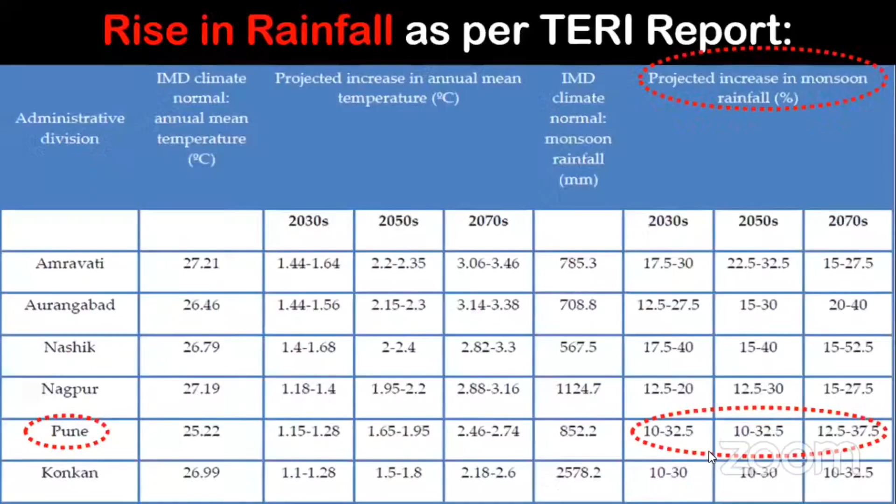Okay, all clear. Yes, yes. Yeah, perfect.

Yeah, so what does TERI say? They have divided the entire state into 6 divisions. Out of that, for Pune division, by 2030 the rise in annual rainfall is going to be 32.5%, and up to 2070 the annual rainfall is going to rise by 37.5%. This is a huge rise, more than 30% is a huge rise. And in fact, what is being observed is the actual rise in annual rainfall is more than what is predicted, so they are conducting additional studies for this.

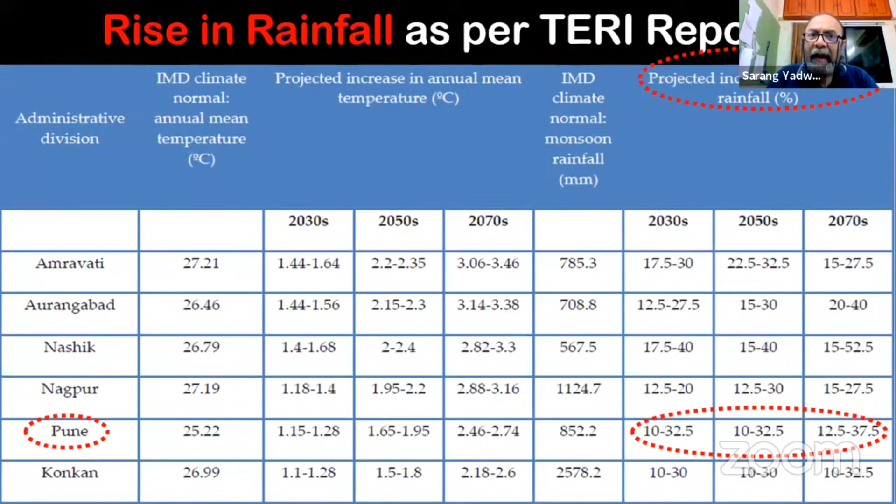And more importantly, what they have said... Shatakshi, yeah.

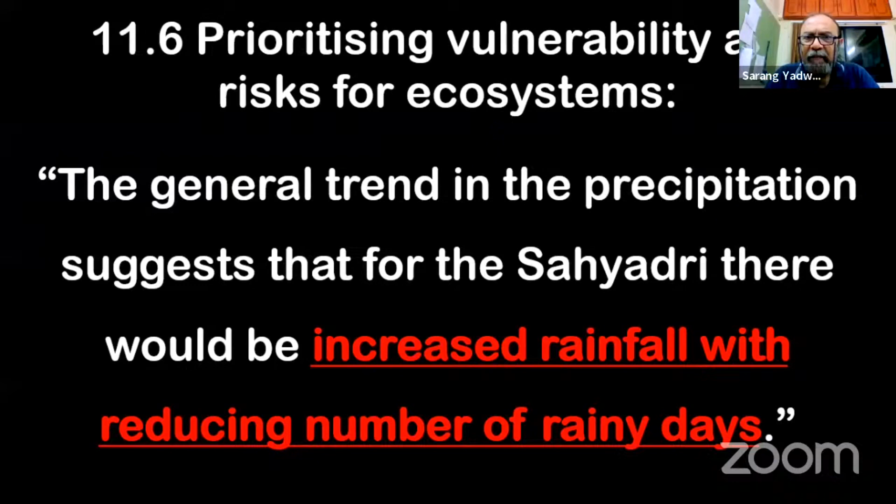They have said that a general trend in the precipitation suggests that for the Sahyadri, there would be increased rainfall with reducing number of rainy days. Means we are going to get increased rainfall. We are on the eastern edge of Sahyadri. They clearly stated that in Sahyadri, rainfall is going to increase, but rainy days will be reduced, meaning the intensity of rainfall is going to rise. We are going to experience more events of cloudbursts, and we all know cloudburst means floods everywhere.

In 2019, we have experienced it from a very close distance, as far as Mula, Mutha, or even the small tributary Ambil Odha is concerned.

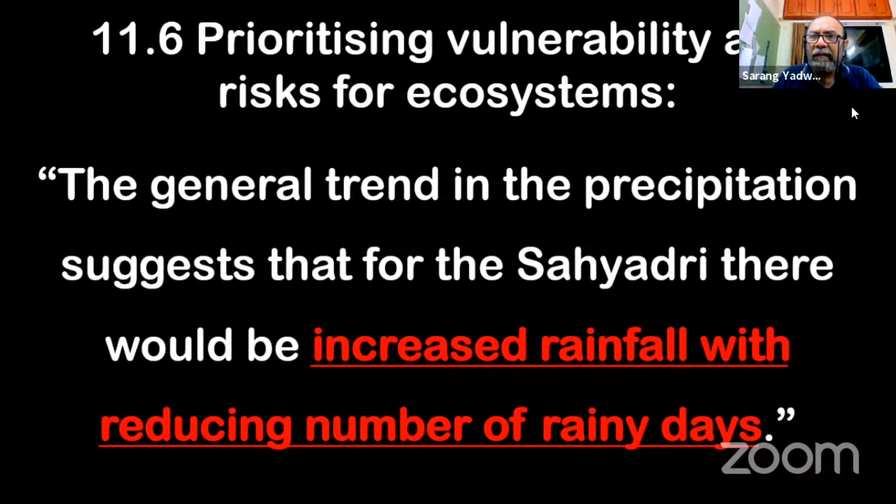Now, what are the objectives? Objectives as given in the DPR are: first, topmost objective of this project is to reduce risk of flooding. Second is clean the river and make it pollution free.

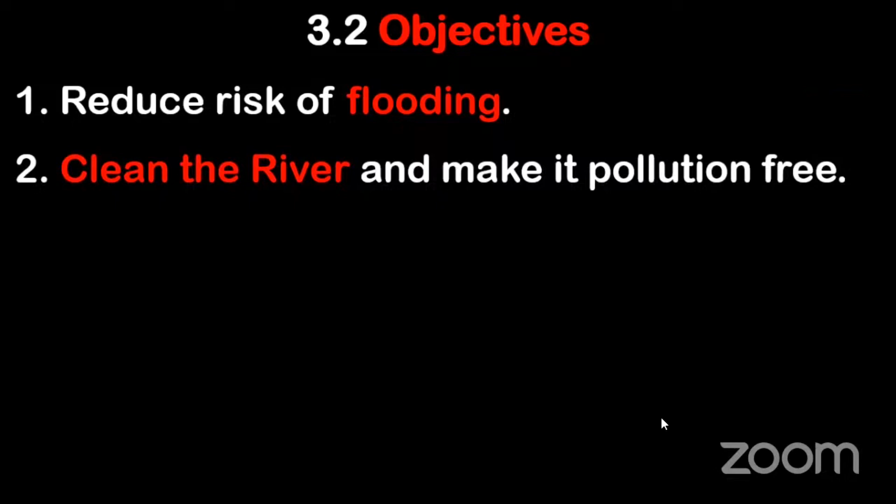Something is wrong, Shatakshi, we can't see the screen. Yeah, but I am clicking, and the next screen is not coming.

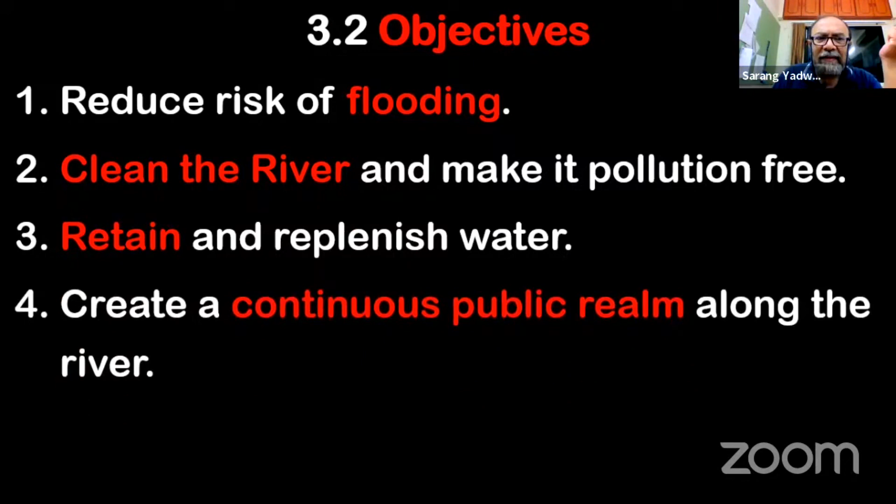Third is retain and replenish water. Fourth is create a continuous public realm along the river. Fifth is conserve and enhance heritage structures. There are a few more objectives also, but these are the topmost 5. And remember, reduce risk of flooding is the topmost objective, and nothing wrong in that.

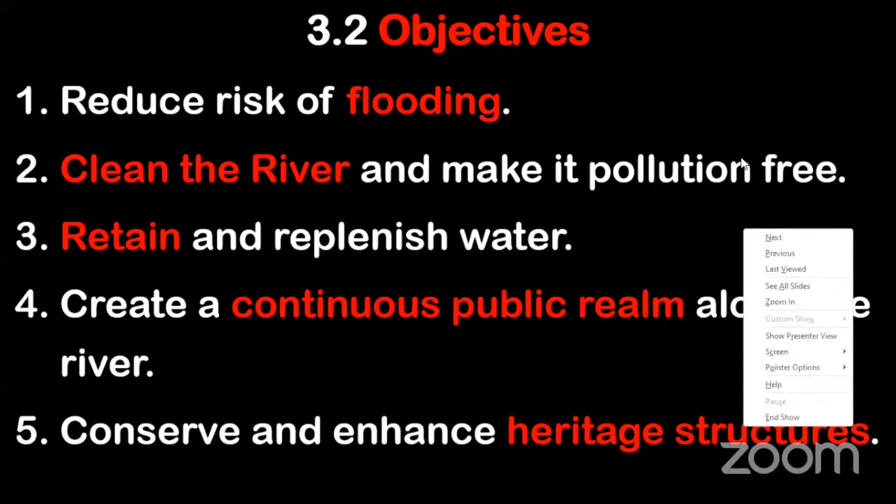So actually the hydrology and hydraulics report of this DPR says that riverfront, on page number 25, it is mentioned that riverfront is not a flood control scheme, and as such, it is not supposed to provide greater protection to the areas on riverbanks which have even otherwise been damaged by floods. Now, on one hand, you are saying that protection from flood, reducing the flood levels, is your topmost objective, and in a corner of the DPR, you are completely getting away from it by way of this disclaimer. You are clearly saying that this is not your responsibility. The flood levels may not reduce. So what is the problem?

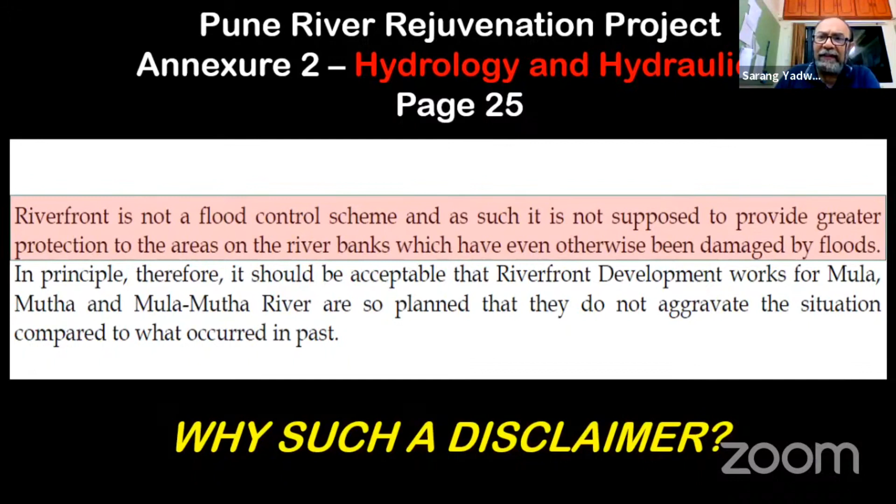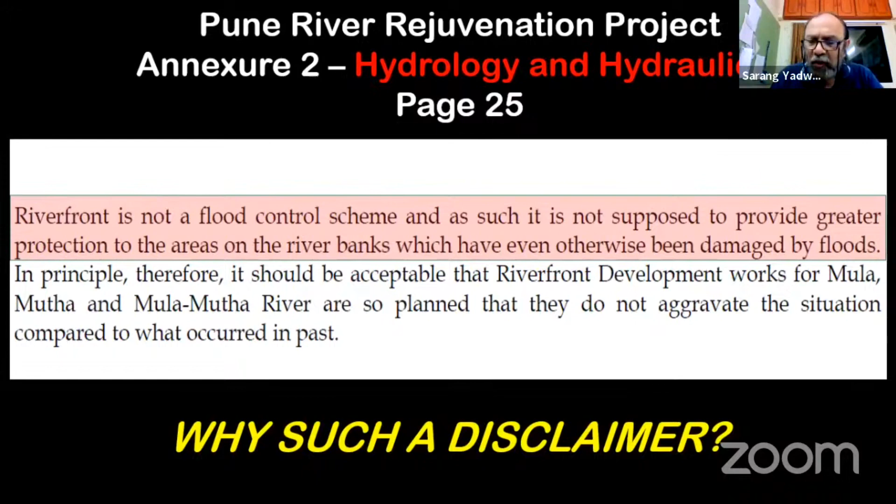Why such a disclaimer? And in case of such a disclaimer, why is such a DPR accepted by PMC? In fact, I discussed it with many corporators. They said that we are not even made aware of such a disclaimer. So the project consultant has very subtly shrugged off his responsibility of reducing the flood levels, which is the topmost objective of this 5,000 crore project. In fact, why is he doing so?

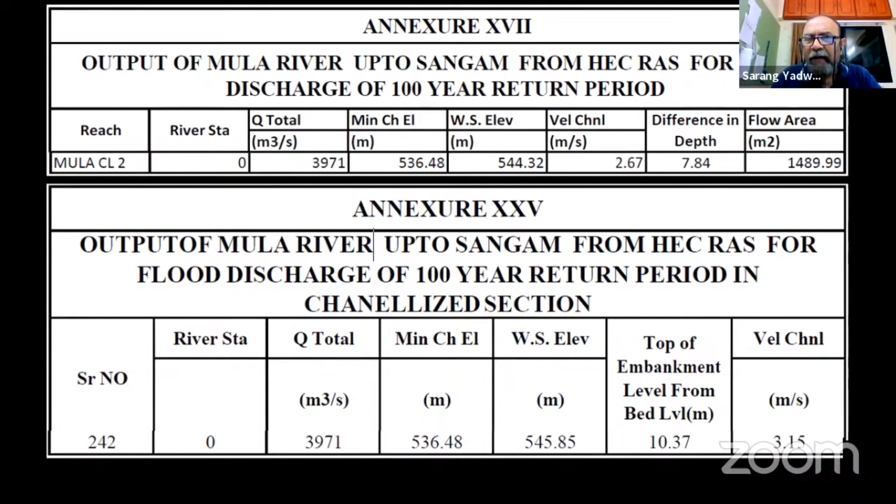Annexure 17, here they have given Annexure 17 and Annexure 25. They have given this from the hydraulics report. These are the flood levels. Water surface elevation means flood levels.

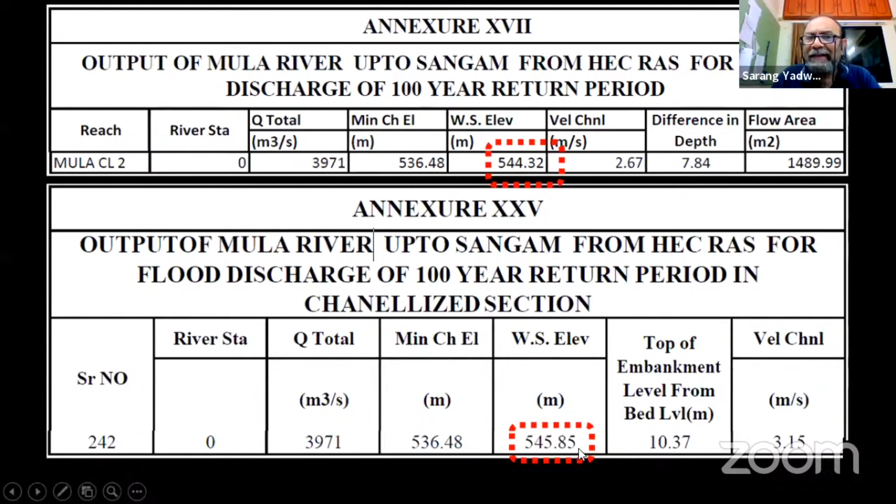This first one, 544.32, is the flood level of Mutha near confluence with Mula. Sorry, this is Mula river near confluence with Mutha in the natural situation, in present circumstances, and the water surface elevation is 544.32. The output of Mula river up to Sangam for the same discharge in channelized section, meaning after completion of the project, is going to rise to 545.85. This is not our conclusion, this is as it is stated in the detailed project report, in the hydraulic study of the report. So the rise in flood level of Mula river is by 1.53 meters, meaning 5 feet.

A 5 feet vertical rise will lead to kilometers of submersions on both the banks of the rivers.

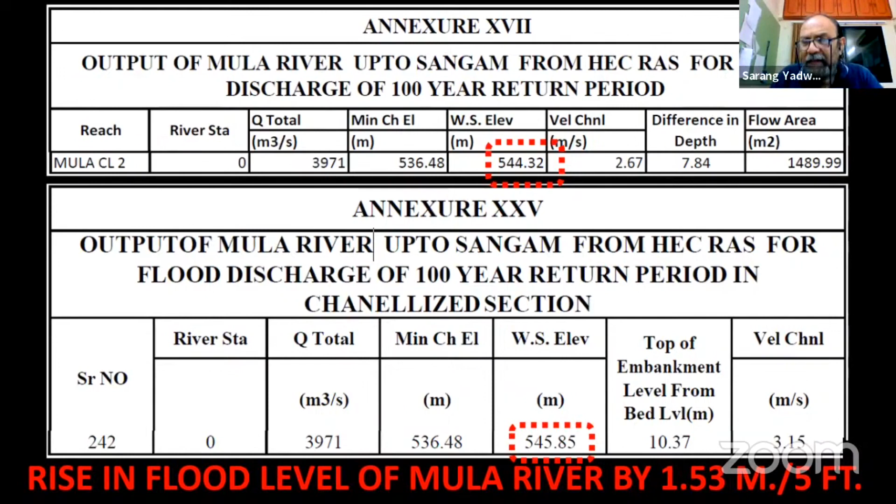They bring in huge quantities of water into the river during rainy season because of surface runoffs. This flow is called the free catchment area, on the downstream of the dam but within the city and upstream of the city. There is no control over the flow from the free catchment area, and in Pune all these rivers receive 4,248 cubic meters per second of flow from the free catchment area. This is a huge flow. The total area of the free catchment is 1,296 square kilometers.

This flow of 4,248 cumecs has not been considered while working out the flood levels. In the hydraulics report, this flow has not been considered. This is a big mistake. It's not that they are not aware of it — it is mentioned in the DPR, but clearly it is not considered in the calculations. So we are going to receive much more flood than what they have considered.

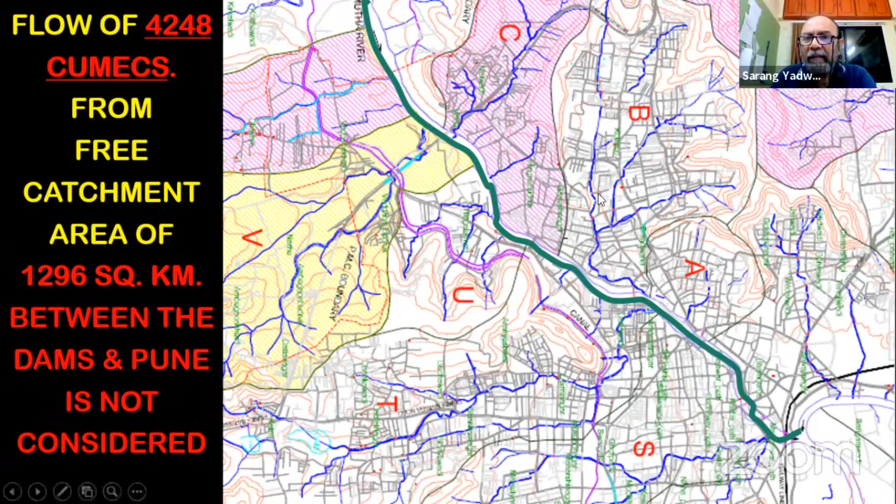These are the levels mentioned in the DPR for the 100-year flood after completion of the project. Near the confluence, the flood level of Mutha will be 544.1 meters. For Mula, it is going to be 545.85 meters. And for Mula Mutha, it is 546.65 meters. It means the water flowing from Mutha will rise. Can you imagine water flowing downstream suddenly rises — this rise is 2.55 meters, more than 8 feet.

So how will the water coming from Mutha River rise suddenly at the confluence and then again start flowing downwards downstream? It is physically not possible. But these are the figures from the hydraulic report of the DPR. The water coming from Mula River also is going to rise.

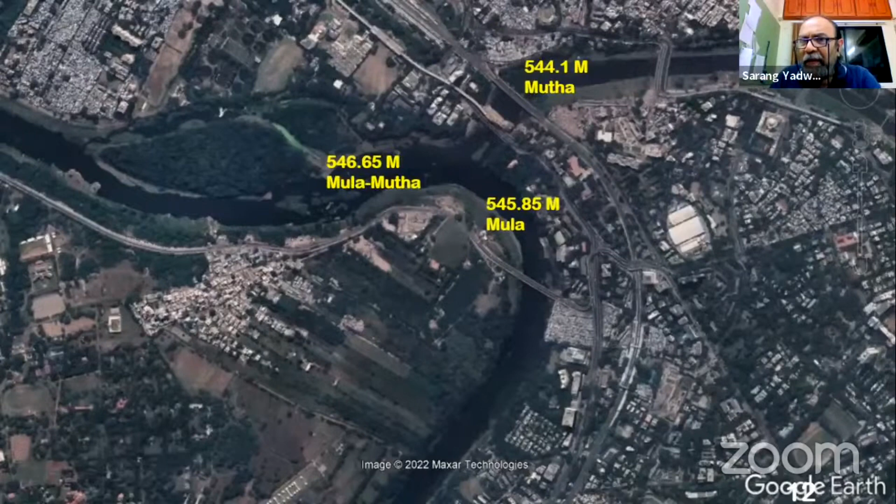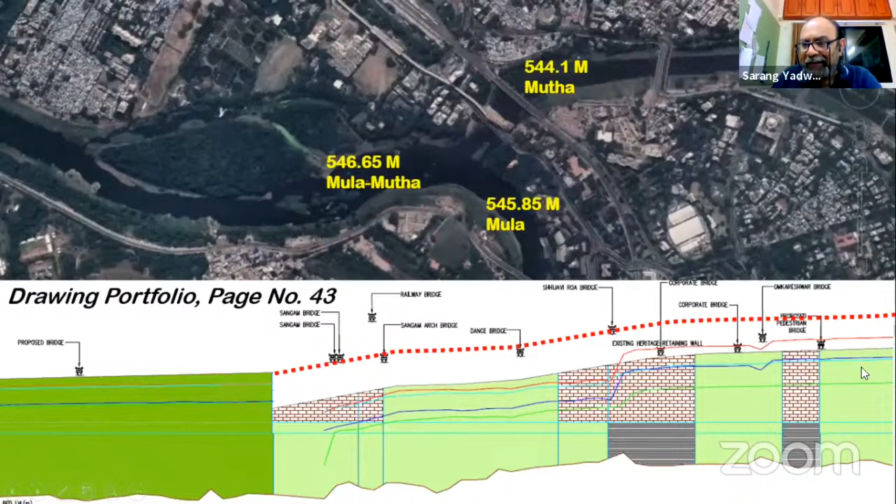In this chart, see: flow area, water surface elevation, and flow area. Existing flow area of Mula River near Sangam is 1,860 square meters, and the proposed is 1,151. So the flow area, cross-section of the river, will be reduced from 1,860 square meters to 1,151 square meters.

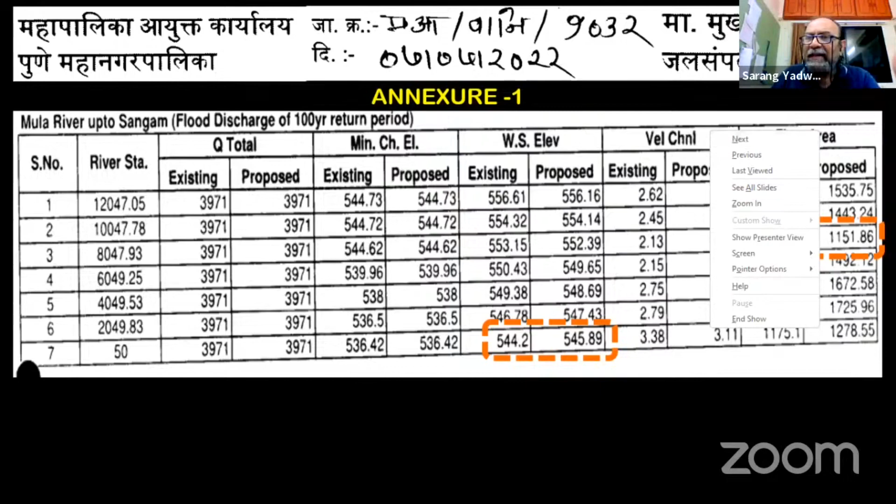At the bottom, water surface elevation, that is the flood level, is rising from 544.2 to 545.89. So the project itself, the Commissioner himself, says that on one hand he claims we are not going to reduce the cross-section of the river, but in giving this chart, it is clearly stated there will be a massive reduction in the cross-section. And because of the reduction, flood levels are also rising.

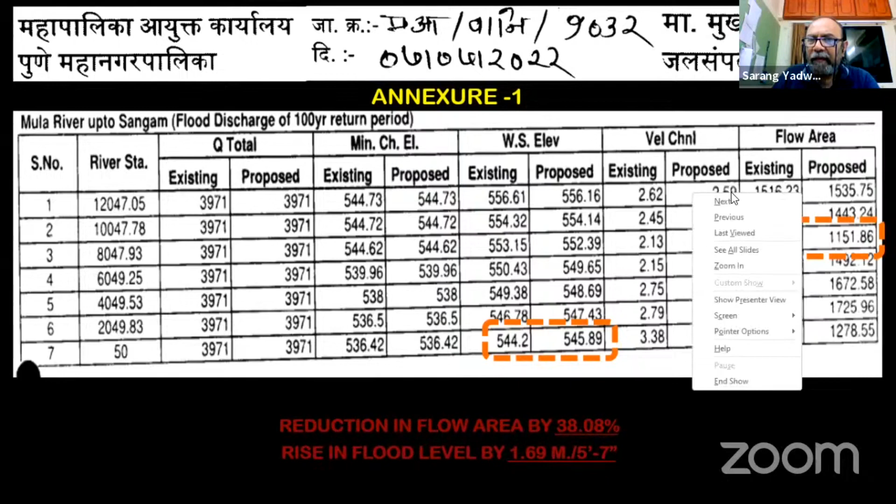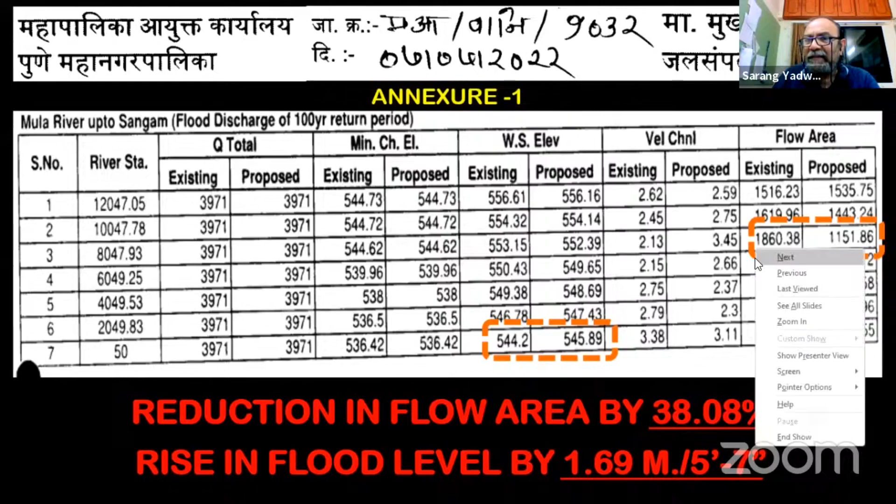Reduction in cross-sectional area is by 38.08%, and rise in flood level here is 1.69 meters, that is 5 feet 7 inches. That's a massive rise in flood levels. It is going to be like this.

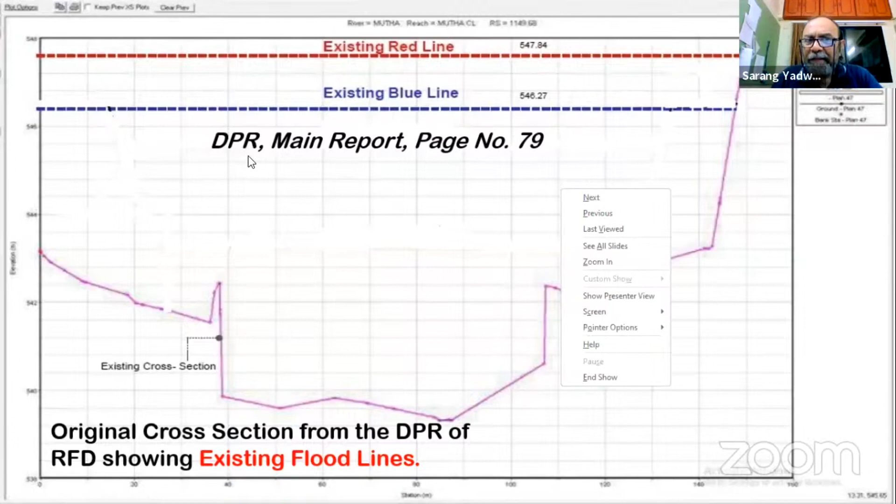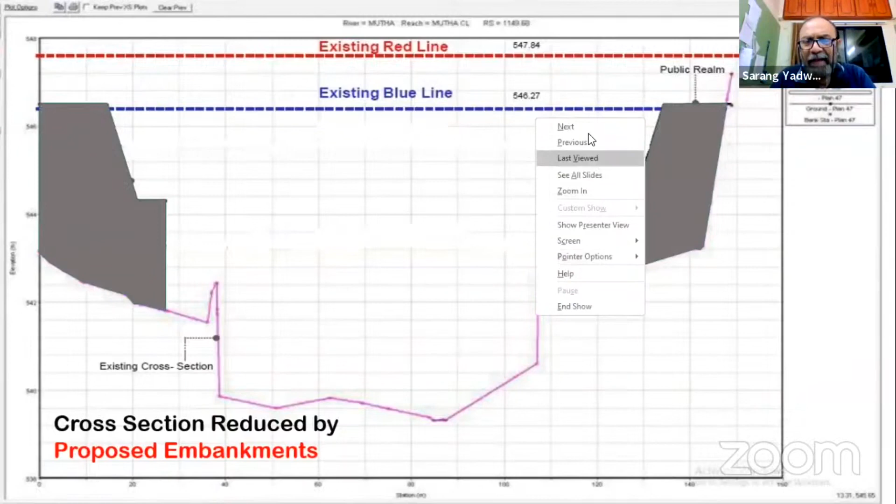This is the original cross-section as given by the Water Resources Department. This is the existing red flood line, and lower is the blue flood line. It is given in the DPR at page number 79. These will be RCC embankments constructed right in the riverbed, narrowing and pinching the river, reducing its width. There will be concrete or soil filled up behind these embankments, which we can see around Bund Garden or Kalyani Nagar.

In spite of this, the corporation claims that the red line will come down by 2 meters and the blue line will come down by 3 meters. After reducing the width of the river, reducing the cross section by 38%, the corporation says that flood levels are going to come down, which is technically impossible.

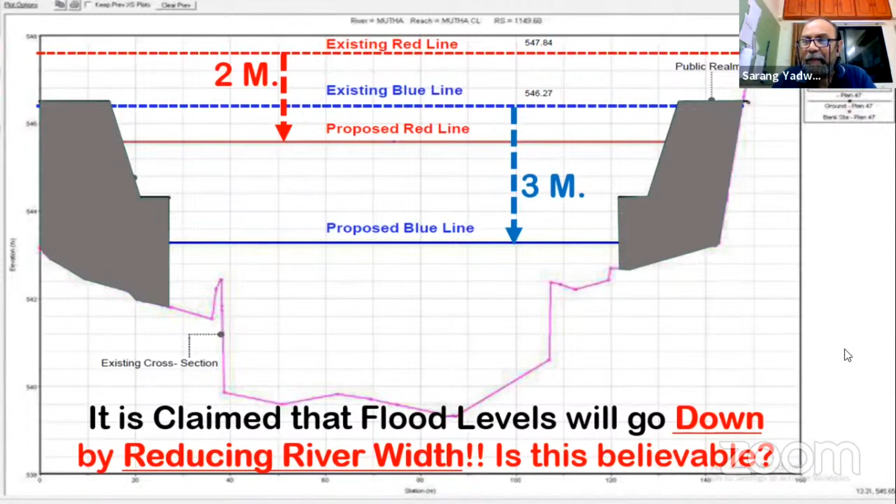So why are they doing it actually? The original width of the river is this much, huge, and they are going to dump debris and construct embankments on both the banks.

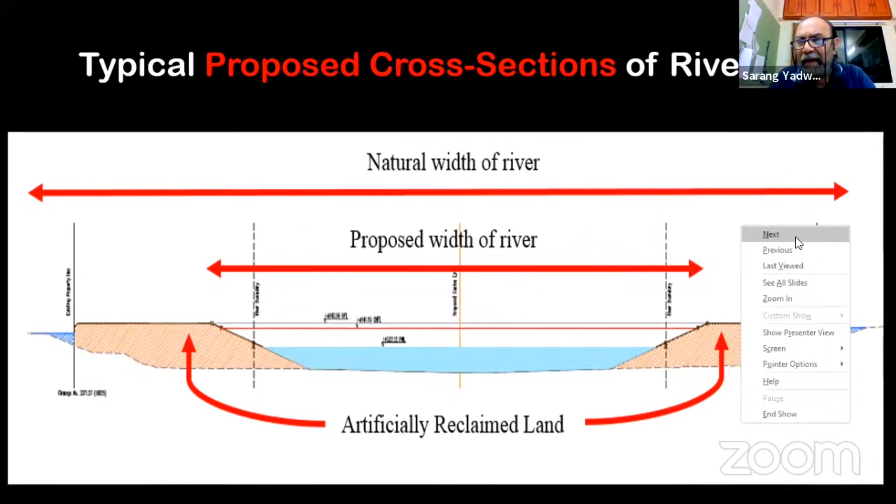At Bund Garden, the original width of the river is 700 feet. In 700 feet, they have constructed embankments on both sides by 150 feet, so the width of the river is being reduced to 400 feet. And these embankments later on are going to be used for commercial purposes, like restaurants, food plazas, car parking, etc. So that is the real purpose behind it.

At many places, they are even constructing the embankments above the level of the surrounding ground. So what will happen to the surface runoff that normally flows into the river? Because of these embankments, it will be stopped, and pluvial flooding will take place on both banks of the river.

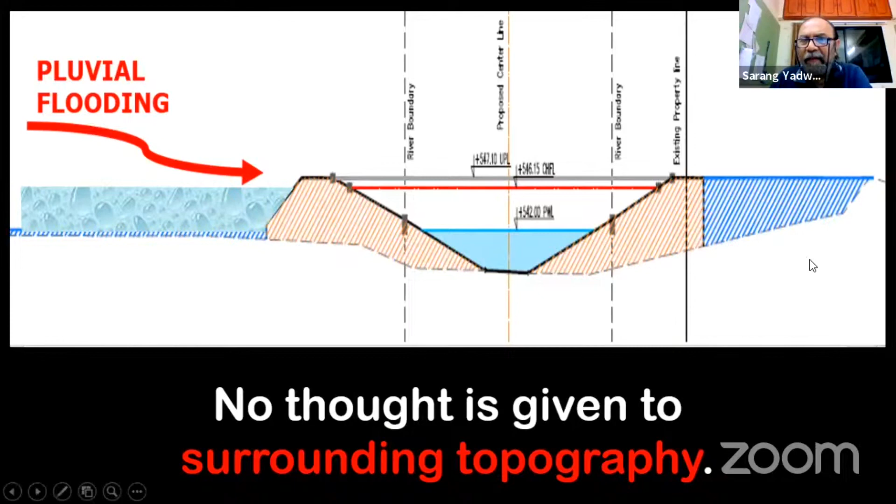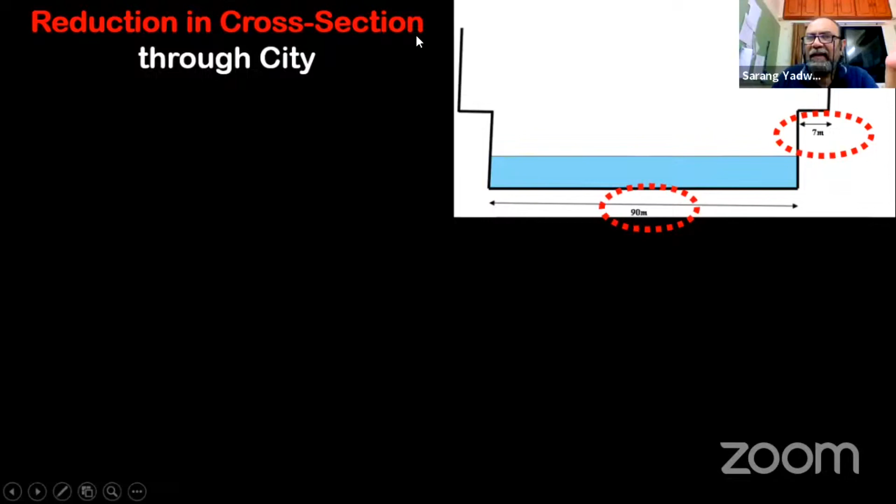Within the city, this is the cross section given in the DPR. The width of the river will be reduced to 90 meters. Vertical RCC walls will be built and the width of the river will be reduced to 90 meters.

Now, near PMC, behind PMC, this is the construction of the metro. The width of the river as of now is more than 150 meters. So from 150 meters, they are going to reduce it to 90 meters.

What will happen? Will the water be able to flow through such a narrow section? They are converting it - can you imagine, this is the cross section of a river or a canal? It's a canal, a concrete canal.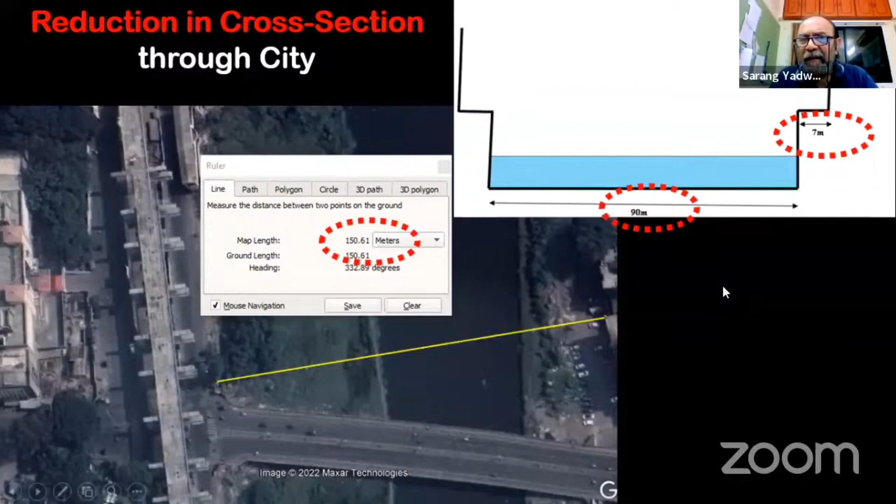The corporation claims that CWPRS have examined the total DPR and given clearance to this project. They have said this everywhere.

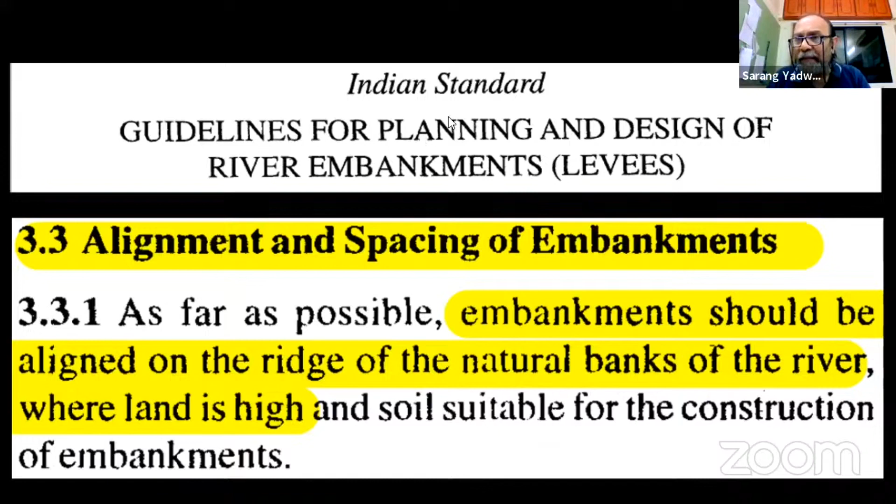Now, Indian standards - this is the Bible we follow everywhere in construction - give certain guidelines for alignment and construction or spacing of embankments along rivers. The Indian standards say embankments should be aligned on the ridge of the natural banks of the river where land is high, meaning beyond the edge of the river you can construct embankments. But completely flouting these standards, the embankments being constructed by PMC in this project are right on the riverbed, right on the inside blue line, which is actually a prohibitive zone where no construction is permitted.

Such are the embankments - these are concrete embankments. This is the original saucer shape of the riverbed, and it will be converted into steps like this. Now, what will happen because of this?

The river is connected to multiple aquifers. Some aquifers bring water into the river, and some aquifers take water away from the river and recharge the groundwater table and wells, bore wells. These aquifers will get permanently disconnected from the river, and because of this, the water table will be depleted permanently. No thought has been given to this.

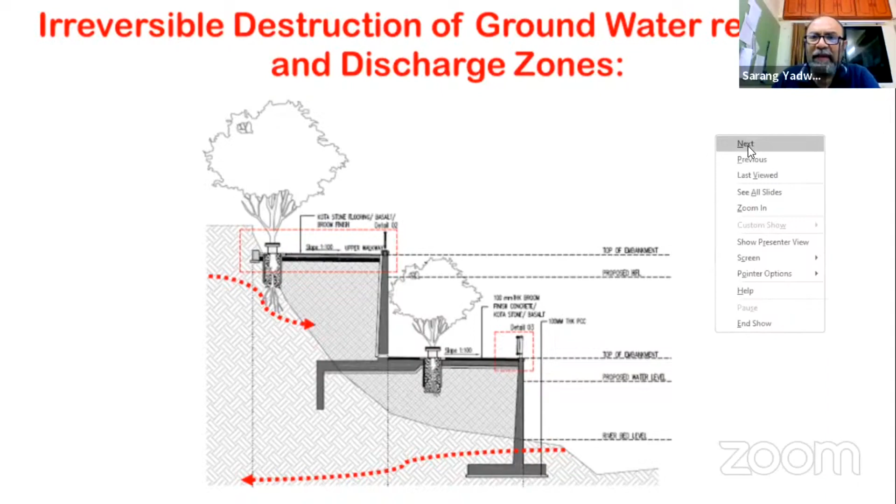Now, let us see what is going to happen to the pollution - whether after this project, the rivers are going to flow clean or not.

Current water supply to PMC from the irrigation department is 1732 MLD, million liters per day. Groundwater extraction in the city is 310 MLD. So the total water consumption is 2042 MLD. These are figures we have received from various government organizations.

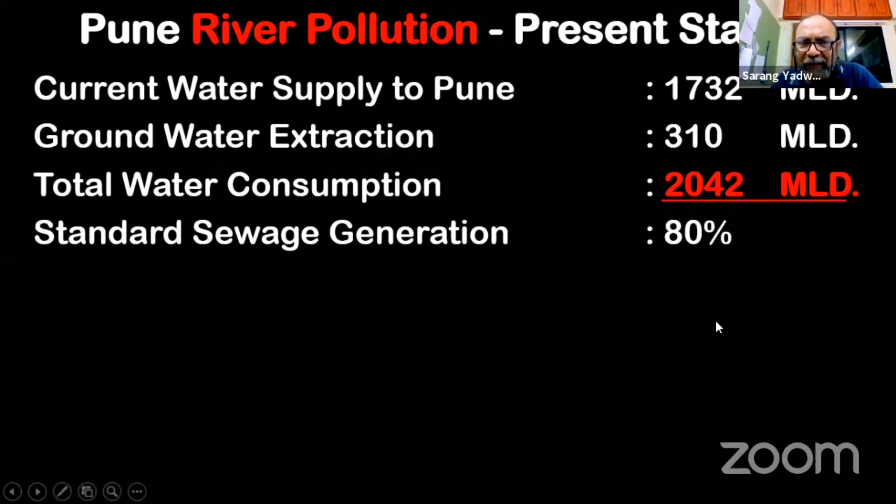As per standards, sewage generation is 80% of the water consumed. So we are generating 80% of 2042 MLD, which is 1634 MLD. This is the total sewage generated within Pune city, and present sewage treatment is only 477 MLD - not even 30%. We are not even treating 30% of the sewage generated by us.

Corporation has proposed some sewage treatment plants. They have been proposing it since 2015, and haven't yet completed even the land acquisition required for the STPs. The total proposed STPs are 528 MLD, so the total sewage treatment capacity will be 1005 MLD.

Even after completing all sewage treatment plants, even if we consider they are operated at 100% efficiency, our total sewage treatment capacity will be 1005 MLD. So there will be a deficit of 629 MLD after completion of JICA and riverfront development projects. That is 62,900 tankers of raw sewage that will be released into rivers without any treatment.

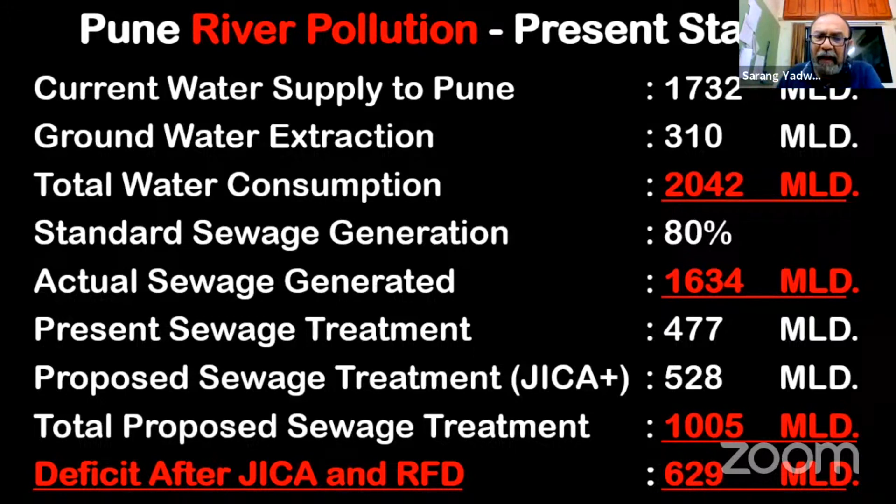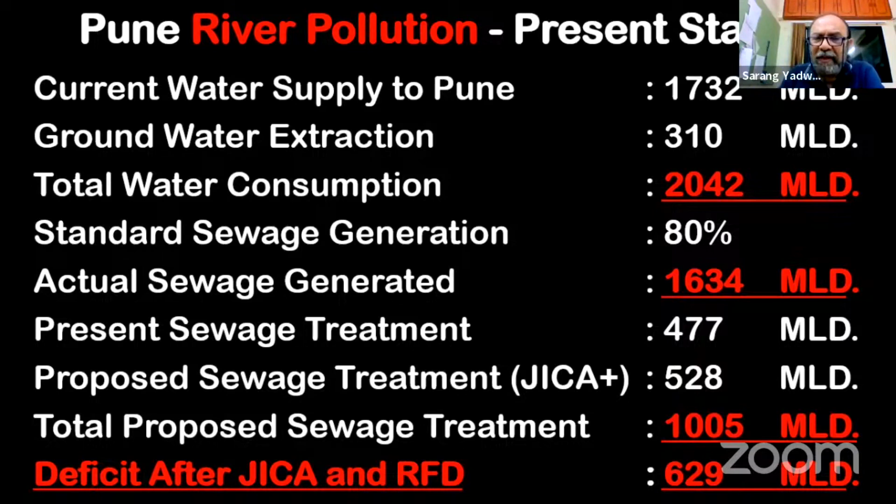Remember, JICA is an independent project where PMC is proposing new sewage treatment plants. It has nothing to do with RFD. Riverfront development is a totally different project. The corporation is confusing citizens that STPs are proposed under the riverfront development project - that is not the case. We have nowhere opposed this JICA project. We are opposing only the riverfront development.

Now, what will happen to the traffic of the city?

This is Mutha River, this is Jangli Maharaj Road, and this is the riverbed road. Thousands of vehicles, particularly two-wheelers, travel from Kothrud side to the city side up to Shaniwarwada by this road. The length of this road is around 3 kilometers. They cross the river on Baba Bhide Bridge and go to the city - thousands of two-wheelers in the morning and thousands in the evening, and they return.

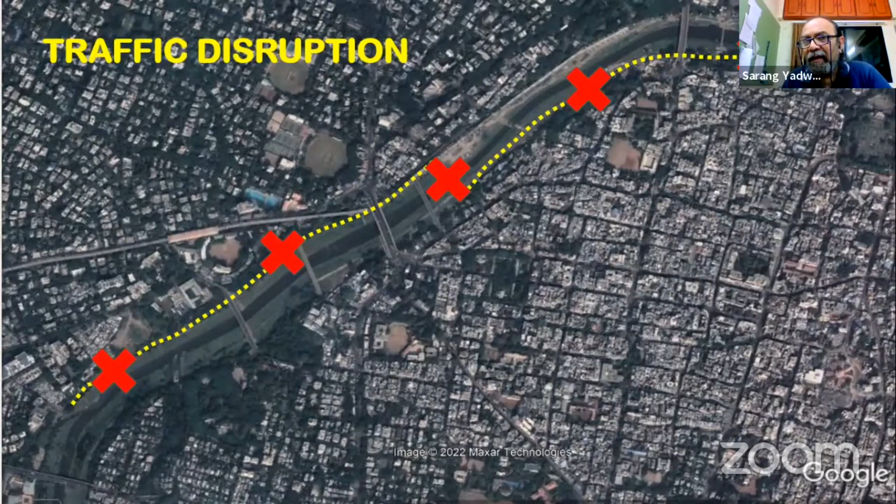This road and Baba Bhide Bridge will be pulled down for this project. So what will happen to the traffic? Nothing has been done - no solution has been given to this, and no traffic study has been conducted for this project.

Totally 4 bridges are to be demolished.

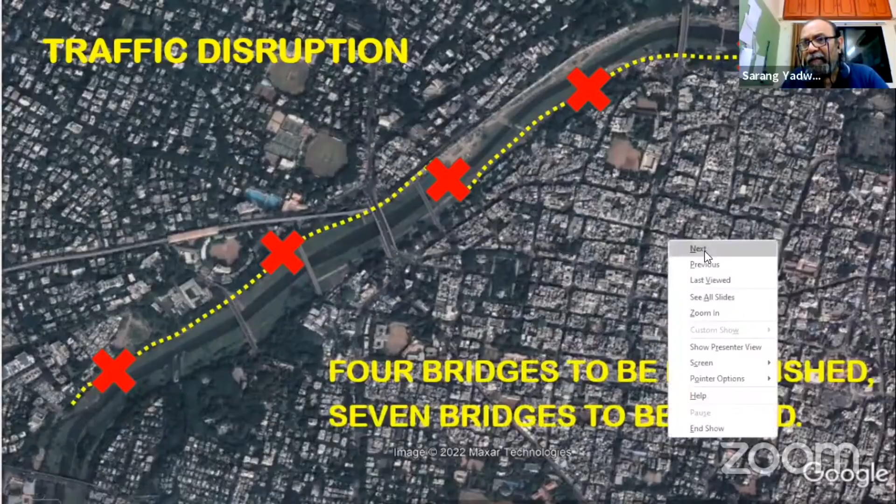Now, this project has also received environmental clearance from the government, and it is a completely flawed environmental clearance. Why? SEIAA, that is the State Environment Impact Assessment Authority, while giving environmental clearance, stated that the committee has not gone into this aspect - there are 4 huge barrages to be constructed in this project.

The project proponent informed that there are 4 barrages to be constructed at following places A, B, C, and D. The committee has not gone into this aspect. Proper appraisal from the proper authority in this regard is solicited. So they have not conducted any study of these barrages, particularly as far as their impact is concerned.

Barrages are dams, so the river will not be flowing because of these dams. These dams will stop the natural flow of the river. The water will be impounded, and it will be like 4 huge ponds of stagnant water - stagnant, polluted raw sewage - within the city because of these barrages. And SEIAA, without conducting any study of the impacts of these barrages, accorded environmental clearance to this project.

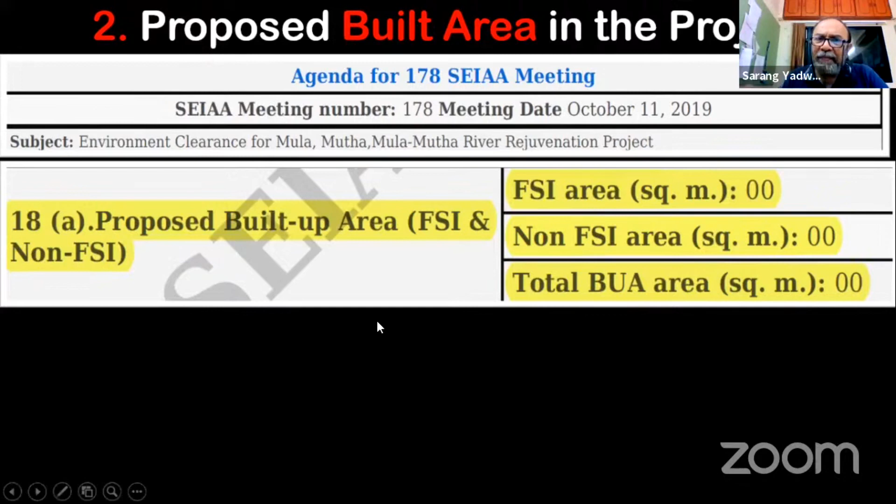Now, there are 2 types of built-up areas: one is FSI and the other is non-FSI. FSI means where there is a roof, and non-FSI is open, like roads or parking - that is built area, but non-FSI. In the SEIAA meeting, the corporation informed that the proposed built-up area, both FSI and non-FSI, is 0 square meters. So the corporation is not going to build anything as far as this project is concerned.

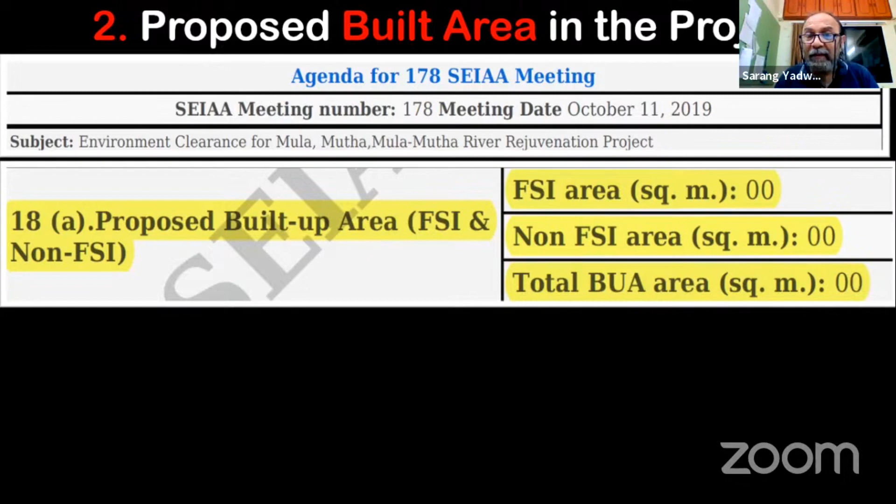Then what are we spending this 5,000 crore rupees on? What are we doing with that 5,000 crore rupees?

When we studied the cost estimates, the actual built area is around 22.5 lakh square meters - more than 556 acres. And to get the environmental clearance, the corporation has said that only 0 square meters will be constructed in this project. Retaining walls, RCC slabs - there are innumerable structures proposed in this project.

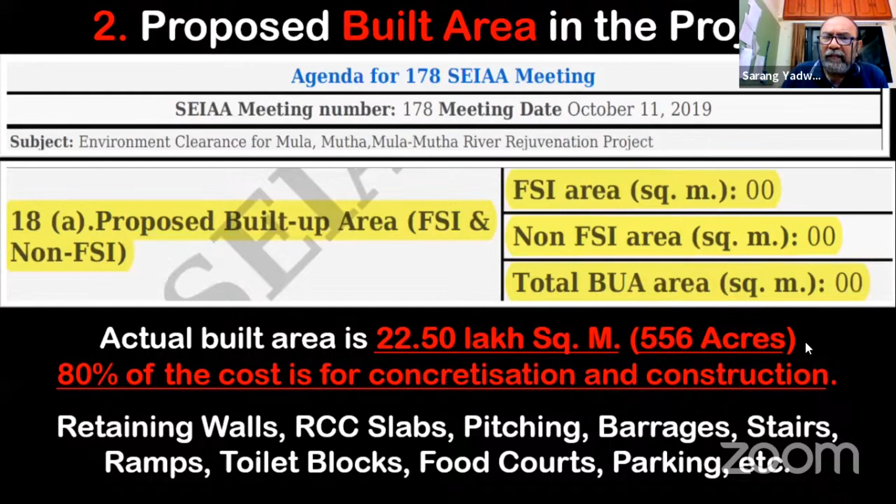Corporation has said to the SEIAA that there are no existing structures. Actually, there are so many existing structures, including around 40 plus bridges, so many dargahs, samadhis, ghats. There are so many innumerable existing structures, but the Corporation has misled the SEIAA to get the environmental clearance.

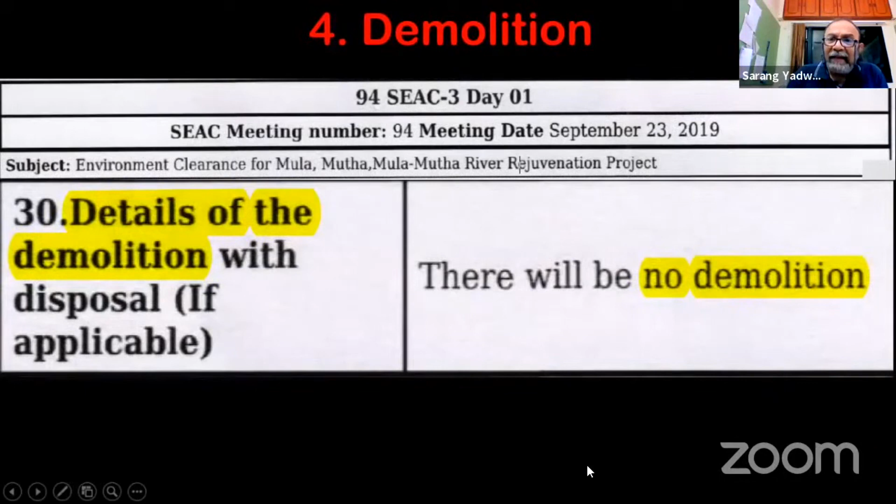They also said there will be no demolition, but actually 4 bridges are to be demolished, and so many other small buildings, weirs and walls will be demolished in this project.

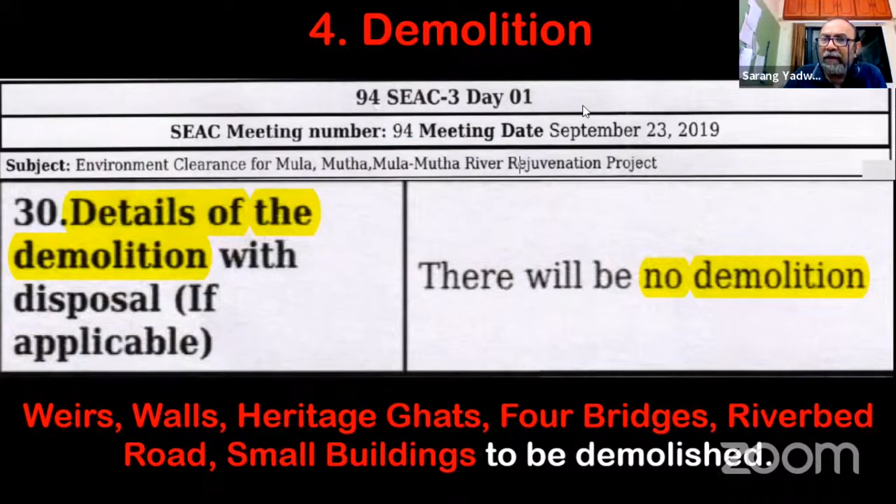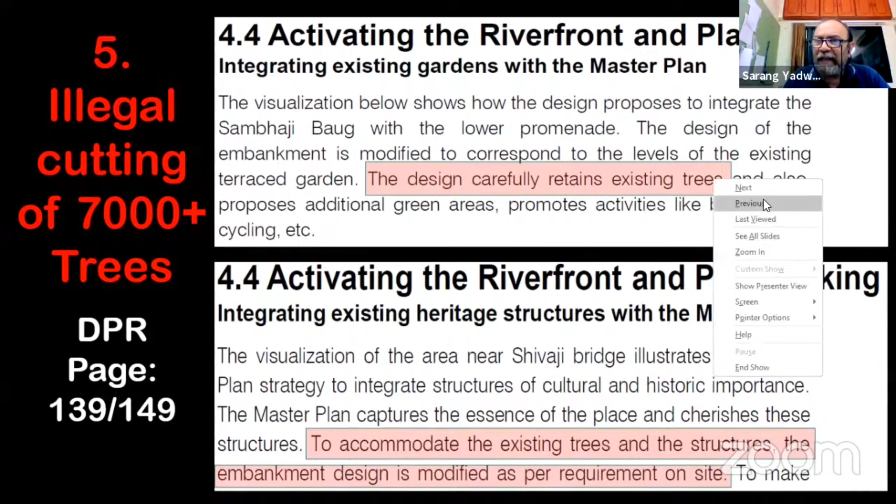Now, this is the latest issue. The Corporation, PMC, has started cutting trees. But what they said in the DPR presented before citizens is that the design carefully retains existing trees. To accommodate the existing trees and structures, the embankment design is modified as per requirement on site. Further, they said Pune city boasts of great wealth of trees. The Pune river edge already consists of a large number of trees, which will be integrated with the proposed riverfront development.

There are already a large number of trees along the river edge in Pune. It is very important to retain and enrich the green heritage of the city. To protect these existing as well as proposed trees in the riverfront development, tree guards will thus be used.

Completely in contradiction with this, the environmental clearance also says: number of trees to be cut, not applicable; number of trees to be planted, therefore not applicable. So the environmental clearance issued to this project is clearly with an understanding that not a single tree will be cut for this project. But PMC has proposed, or even started, cutting down...

More than 7,000 fully grown native trees for only 3 out of 11 stretches. So imagine if 7,000 trees are being cut for 3 stretches, how many trees will be cut for the remaining 8 stretches? Is it acceptable? It was never communicated to the citizens earlier.

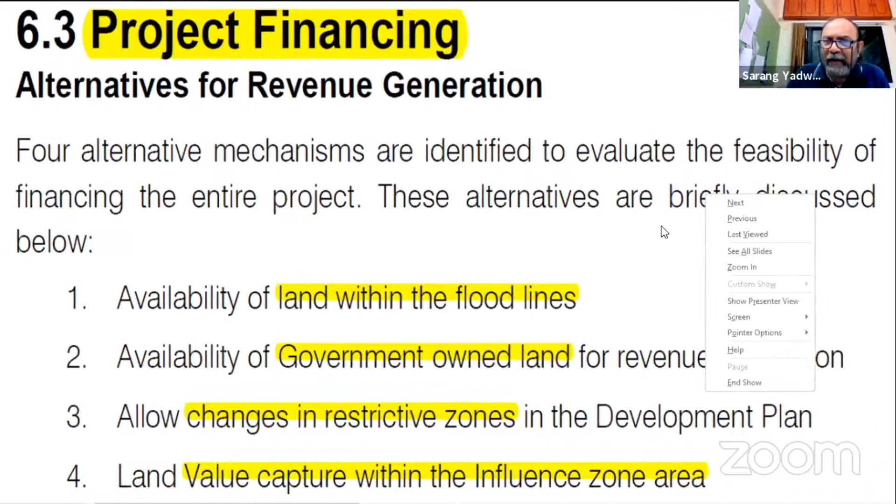As far as financing of this project is concerned, they are planning to monetize the riverbed. It is stated in the DPR that project financing depends on availability of land within the floodlines. So they are trying to capitalize the land in the flood zones, government-owned lands, changes in restrictive zones, and value capture within the influence zone. That is okay, but land within the floodlines will be capitalized.

So what are the impacts? Water Resources Department directions are not at all followed in this project. Environmental clearance is completely flawed and illegal. There is massive illegal tree felling without clearance, monetization of river land and public resources, violation of all norms and Indian standards. The river will continue to remain highly polluted. There will be traffic disruption leading to air pollution. Impact on climate change is not at all considered. There will be a steep rise in flood level, grave risk to life, and irreversible destruction of biodiversity. These are going to be the impacts of this project on our city.

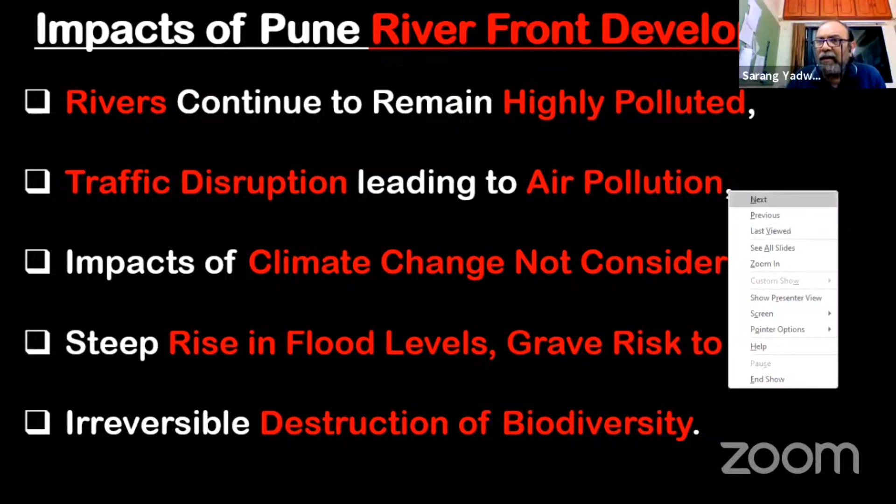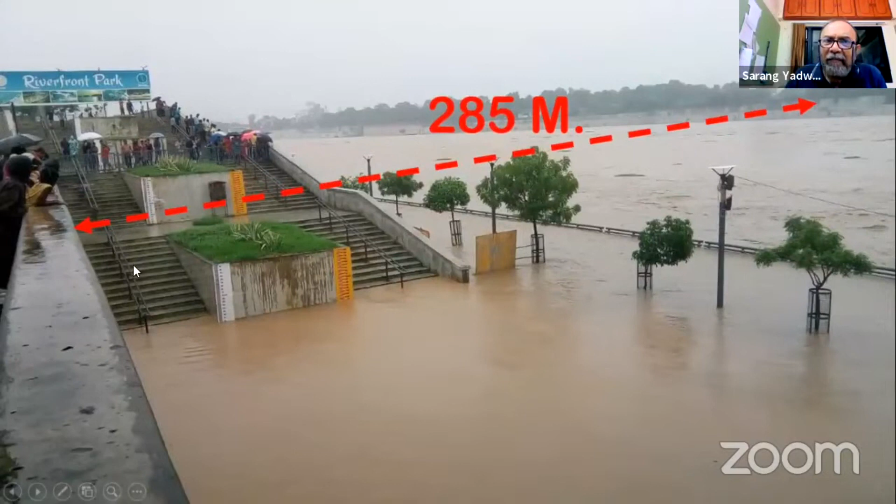Now, we all know that this project is based on the Sabarmati Riverfront Development Project. How is it? This is Sabarmati, completely flooded. For your information, Sabarmati after channelization in the city is 285 meters. In Pune, they are proposing only 90 meters, when we have 6 dams on the upstream side.

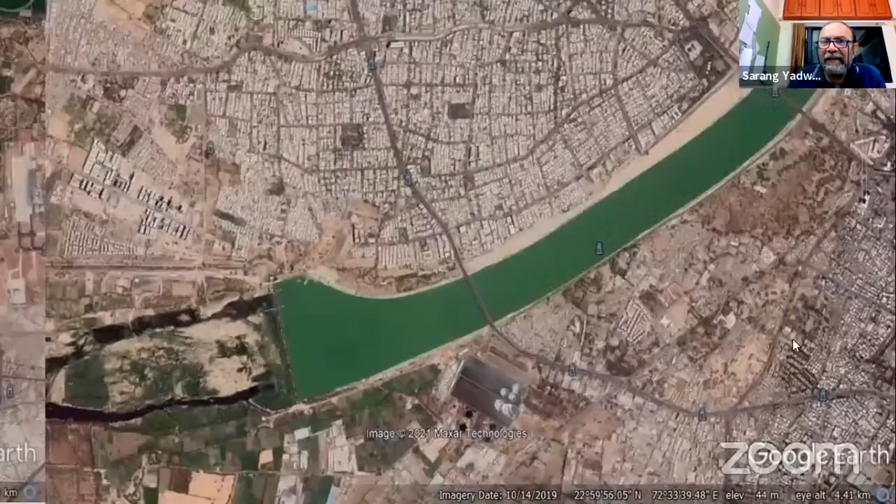This is Sabarmati. See, what is this? This is completely covered with hyacinth. And this is the barrage they have built on the downstream side, at the location of Vasna. This barrage has been constructed, and because of this barrage, the water is completely stagnant and polluted. You can see the hyacinth in the Sabarmati River. This is the model we are following, because the consultant is the same. This is the Sabarmati River.

So it's not that we don't want our river to be rejuvenated. This is our stand: we want our rivers to be rejuvenated, but not by concretization and tree felling. We want it in an ecological way. We do want beautiful rivers, but before that, we want clean rivers, and prior to that, we want safe rivers.